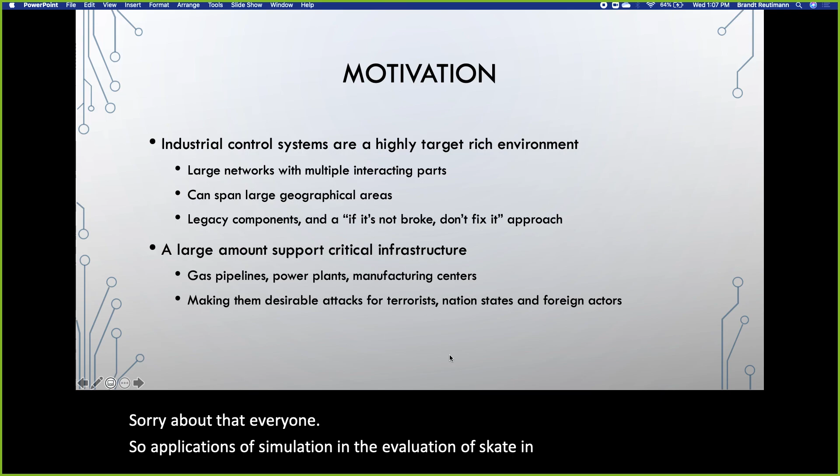Applications of simulation in the evaluation of SCADA and ICS security. So the motivation for our work. Industrial control systems are highly target rich. So what that means is they can typically be large networks with multiple interacting parts.

They can span large geographical areas, and they can have a very heterogeneous composition in the sense that there can be some legacy components, and there can be some new components, and there can be everywhere in between. So what you kind of get is this situation where you have some programmable logic controllers or PLCs that exist that might be vulnerable to cyber attack, and then some newer ones that maybe have the capabilities to prevent these

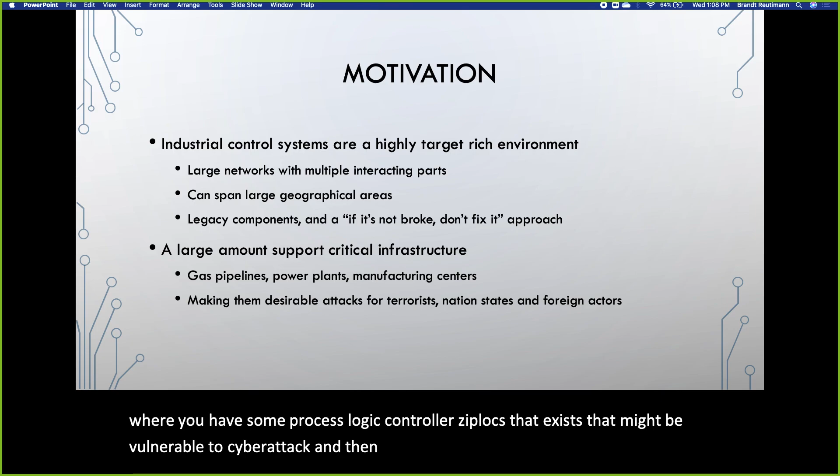attacks. But it's not an all or nothing type of scenario where you can just go in and replace everything with these new and highly updated pieces of technology just because these systems are large and it's expensive, right? So sometimes you don't want to mess with things that already exist, that already work. You don't want to break anything. Some people are opposed to bringing in these new technologies because they know what they have already operates pretty well,

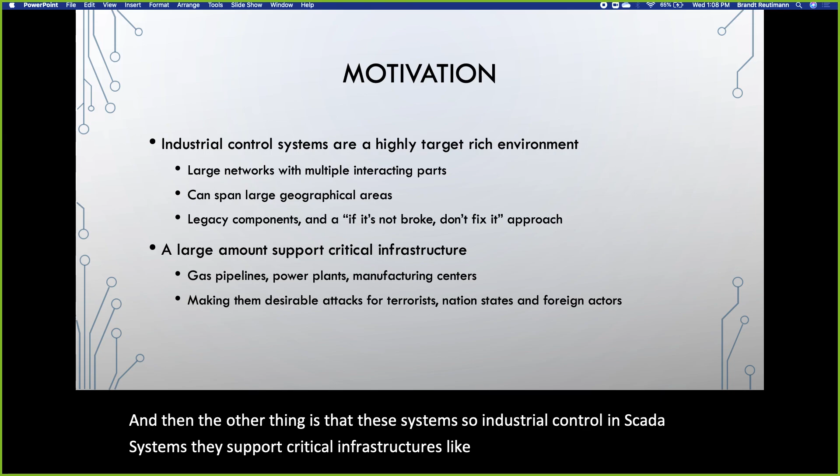right? And then the other thing is that these systems, so industrial control and SCADA systems, they support critical infrastructures like gas pipelines, electrical grids, some manufacturing centers, and other kind of, like I've heard of military bases and other things kind of using these systems, right?

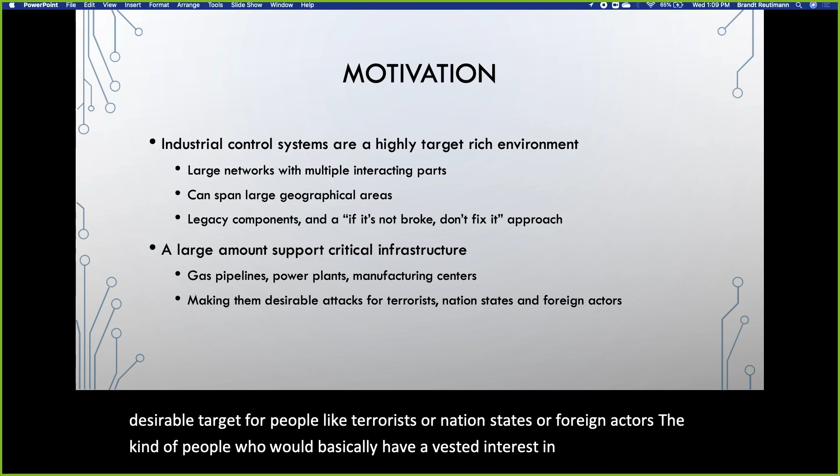And that makes them a desirable target for people like terrorists or nation states or foreign actors, the kind of people who would basically have a vested interest in either compromising these systems, causing harm, shutting them down, whatever. And so, as a result, we want to be able to defend these systems.

Well, testing industrial control systems, especially gas pipelines and electrical grids, testing them for safety is a common thing, and that has been something that's been done for a long time. It's been researched, because the ultimate goal is the people who work at these, whether they're power plants or gas compressors or whatever, those workers need to be able to do their job safely without getting hurt.

And these systems, almost equally as importantly, need to maintain availability. And what that means is that you can't have the power going on and off intermittently or gas going on and off intermittently. These systems need to maintain their availability, right? But the issue is that safety processes like the ones that have been developed haven't really been fully refined to deal with the kind of plethora of cyber attacks that are coming in this kind of new world, right?

As these systems start to become more connected to the internet, whether it's through corporate networks that are connected to these SCADA systems, or whether it's through maintenance workers whose laptops they bring to work and they're on the internet the night before and then they go into work or whatever. There's ways that these systems can be compromised, right? So we need to find ways to test cybersecurity on these systems.

And the issue is that testing on live versions of these systems can be extremely dangerous, it can be expensive, and it can be difficult, right? Because of just the nature of the systems and the fact that they have to maintain availability.

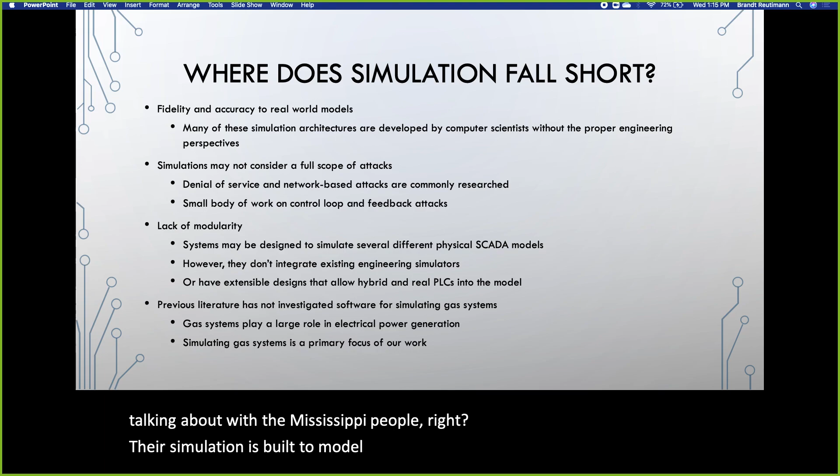I think part of that comes from the fact that a lot of people who work on these models are computer scientists who are really interested in the network security side, but don't necessarily have the knowledge to explore the control loop side. That's where it's useful to be able to collaborate with engineers. Then a lot of these systems lack modularity. They might be designed to simulate a specific physical model. That paper with the Mississippi people, right? Their simulation is built to model this water tower, and that's what it does. But it's not really extensible past that.

And they don't really integrate existing technologies very well. Some people will use Simulink, but it's fairly uncommon. And they're not really designed to swap in and out of these simulators, which we'll talk about later on in this presentation, integrating existing technologies to make these simulations better. The other thing is that a lot of these don't have an extensible design that can allow hybrid PLCs, real PLCs, and virtual PLCs. They might have one or the other, but they're not really able to do all of them.

And there's actually a lot of value to being able to virtualize some of your PLC behavior and have some of them be real and some of them be somewhere in between. That has to do with the cost associated with acquiring equipment, and also the ease of use you can get out of making your own virtual replicas of that equipment you've acquired, right? And then previous literature also has not really investigated gas systems.

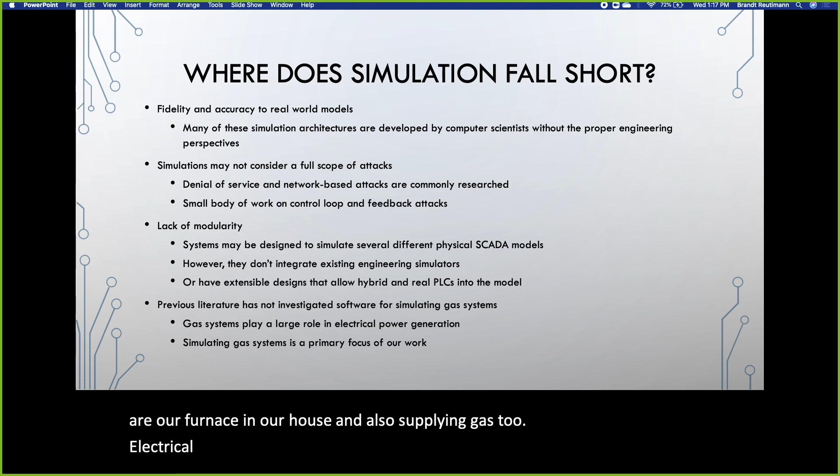A lot of work has been done studying electrical systems and trying to simulate them or build test beds for them. But gas systems actually play a very large role in our daily lives, right? Whether it's our water heater or our furnace in our house, and also supplying gas to electrical power plants. This is something that hasn't really been researched much in the prior literature. So that's why a large focus of our work has been simulating gas systems.

Okay, so why build another simulator? So where do we fit into this kind of whole scope of things? Well, we're trying to design and architect a simulator from the ground up, and we're trying to make it as modular as possible. And what that means is that we want to be able to integrate different physical simulators.

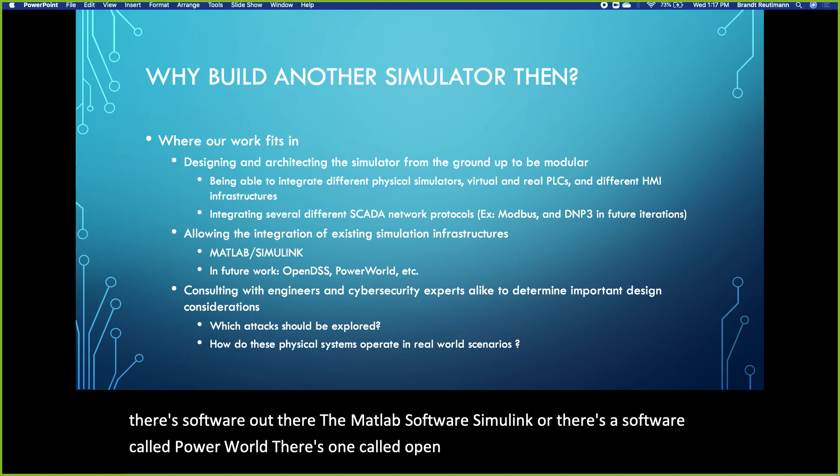So when I say a physical simulator, there's software out there, like the MATLAB software Simulink, or there's a software called PowerWorld. There's one called OpenDSS, I think, where these are kind of built by engineers or really smart people to model these types of systems very accurately using these mathematical models. And we want to be able to leverage that existing technology. So instead of having to go and write our own simulations, leverage the simulations that already exist and integrate those into kind of a cybersecurity environment.

So we want to be able to integrate different physical simulators. We want to be able to take real PLCs that we can acquire if we get funding, or build our own kind of PLCs out of software, and then also integrate different HMIs so that we kind of have this simulation where we can change parts in and out in order to kind of get what we want. So maybe Simulink is good for a gas system, but maybe there's a better simulator for electrical system, let's say. So maybe if you can swap those out, you can kind of do different simulations that way.

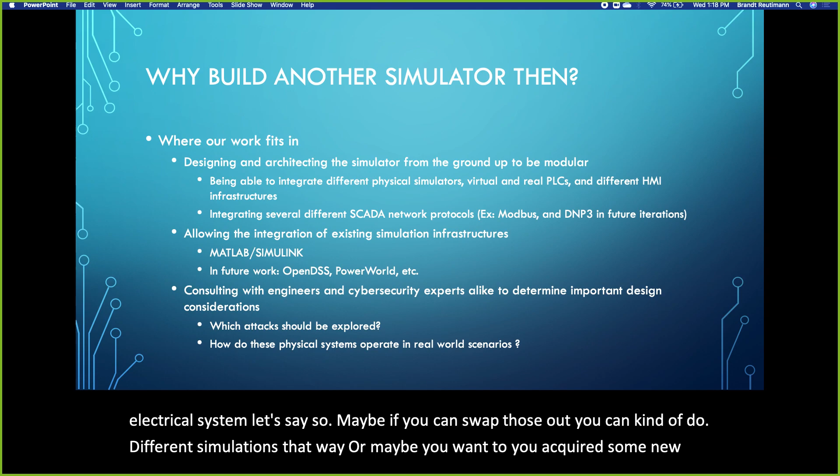Or maybe you acquired some new PLCs and now you had an experiment you were running. Now you want to see what it looks like with this new technology in there. Or maybe you were running an experiment and you want to look at, okay, this company like General Electric has an HMI that they support, and maybe you want to test that HMI with your kind of simulation, or maybe you want to train people on that HMI and use the simulation as a backend. So that's why we want to design it to be modular so we can kind of meet all these different demands, right?

And then again, in the same kind of scope, we want to be able to integrate different SCADA network protocols. So the primary one we use in our simulation is called Modbus, which is an older protocol that's been around in industrial control systems for quite a long time. But there's a kind of new kid on the block protocol called DNP3 that's very popular and is gaining traction. And so what we want to do is be able to kind of swap these network protocols in and out to see, okay, what happens if you were to add encryption to Modbus, or what happens if you use DNP3 and someone tries this kind of attack on the DNP3 protocol. So kind of things like that, right?

And then finally, and I think most importantly, and why I'm grateful that, for example, Dan is here, is consulting with engineers, people like Dan and people at the Powerhouse, people like Sule, and then cybersecurity experts like Dr. Ray and Dr. Gersh, people who have the knowledge of the cybersecurity. Bringing those two groups of people together is super, super important when you're designing these systems, right?

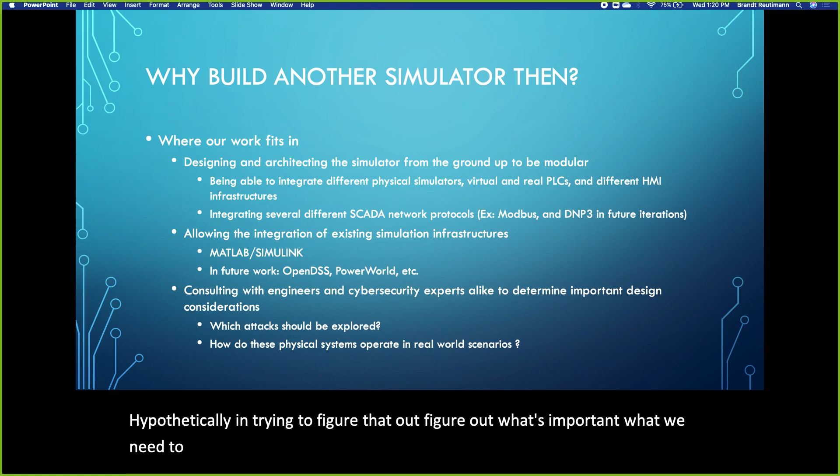So figuring out which cybersecurity attacks and cybersecurity concerns should we be looking at, but then also figuring out, okay, from the engineering experts, what happens to these physical systems if we were to do this attack hypothetically, and trying to figure out what's important, what we need to be modeling, and then integrating that into our technology that we're using to study these systems.

Okay, so we went a lot over what we aim to do and the motivation for how we got here. So before we dive into the design of our system, I want to talk about these important considerations, and we've gone over it a little bit in the goals of our system, but just to make it a little bit more clear. So this is something I talked about, so I'm just going to skim over this slide, but integrating with existing technology, right?

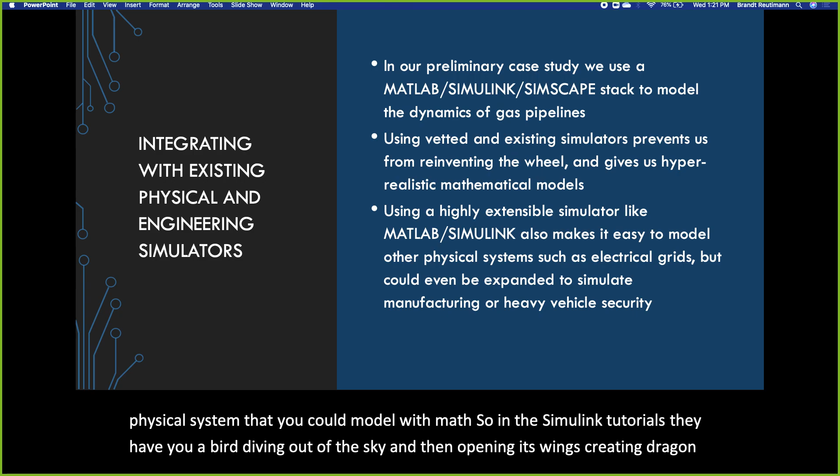So in our model, we use the MATLAB Simulink stack, which is basically a block-based language that can be used to model almost any physical system that you could model with math. So in the Simulink tutorial, they have you modeling a bird diving out of the sky and then opening its wings, creating drag. And so that's a system of equations, right? In the same way, gas systems can be modeled with these kinds of complex mathematics.

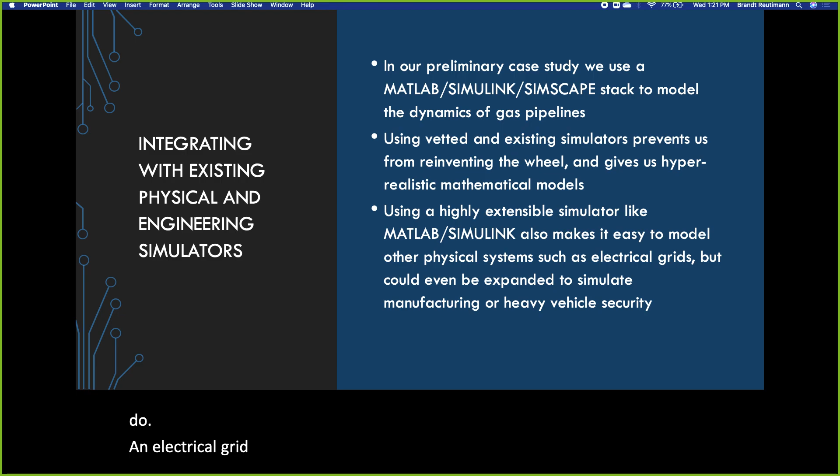But also the value we saw in using this type of Simulink software was that it's not limited to just gas systems, but in future iterations of the project, if we wanted to do an electrical grid, or even simulate a manufacturing center, or even possibly integrate this somehow with the heavy vehicle security work, it might be possible to use Simulink as a simulator for that backend.

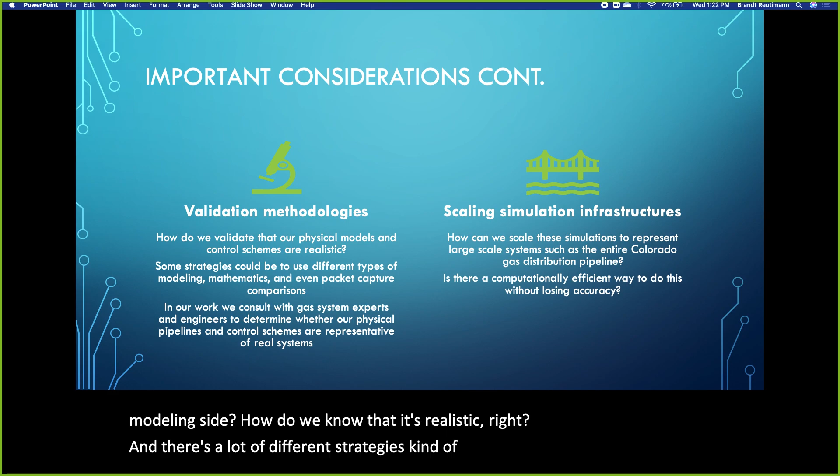So some other important considerations are validation methodologies, and this is something that Dan and I were talking about before the presentation: how do we figure out, especially from the physical modeling side, that what we're doing is realistic? And there's a lot of different strategies to approach this problem. So you could use different types of modeling mathematics and go, okay, the math makes sense, it works out.

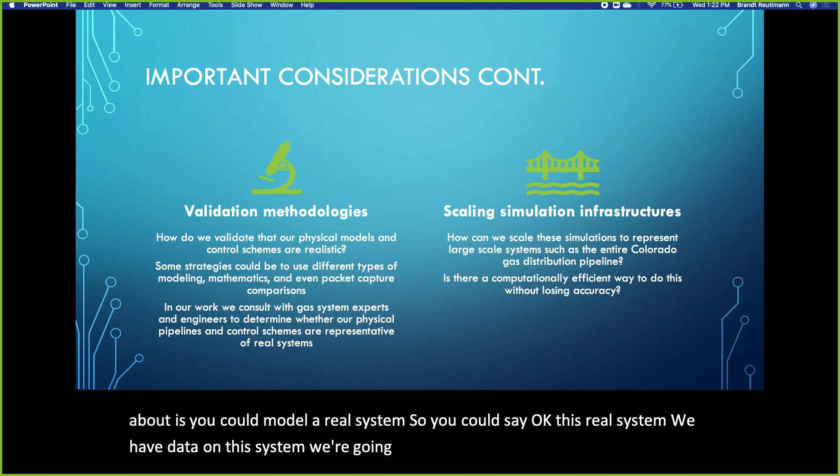One way you could do it, and what I was talking about, is you could model a real system. So you could say, okay, here's this real system. We have data on this system. We're going to try and make a replica in simulation. And then you compare the data that comes out of your simulation with the data in the real world, and you could even compare the packet captures from your simulated controllers to packet captures from real controllers, and using some clever diagnostics and measurements of distance between those two data sets, you could determine how close you are to the actual thing.

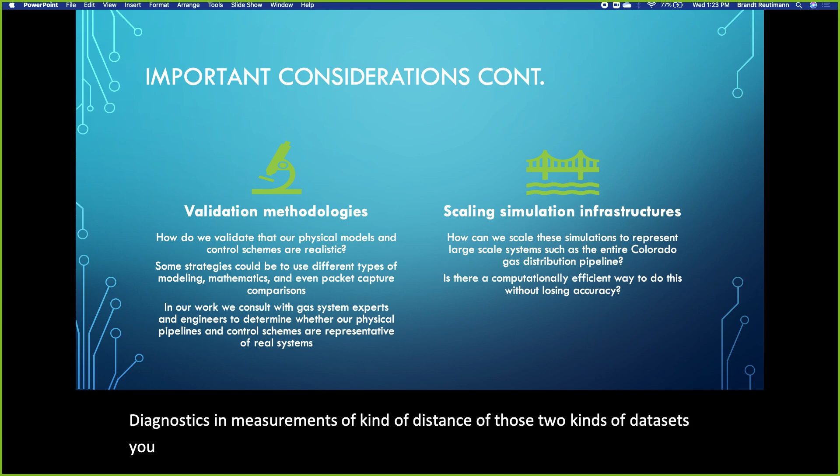The downside to this approach would be that you couldn't take the real system and put it into a sketchy state, right? So with your simulation, you can cyber attack it, and you can say what would happen if all these gas systems suddenly lost a bunch of pressure. You couldn't compare that situation to the real system, because you're never going to want to put the real system in that kind of state that could cause harm to it, right?

So where we are right now in our work is that we mostly just consult with the experts around us, or at least I do, to try and figure out how far off we are, and if we're in the ballpark of how a real system would actually act.

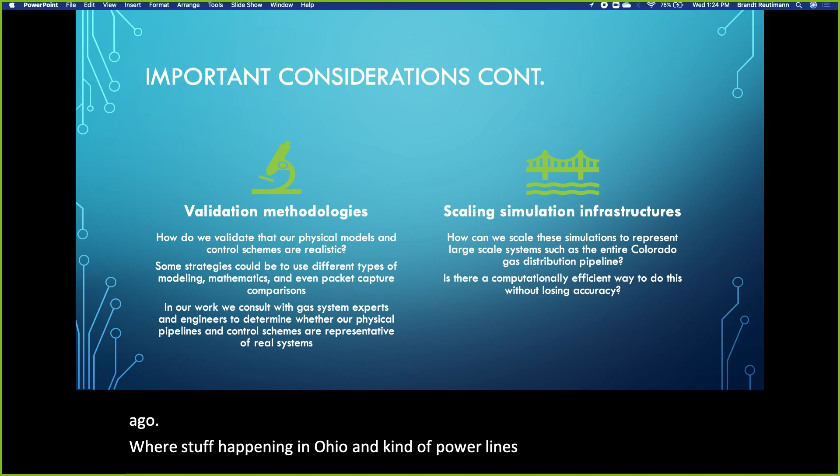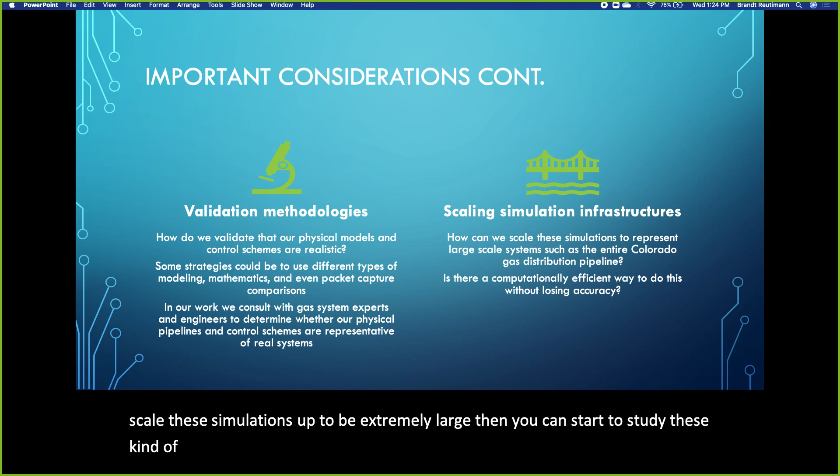Then scaling simulation infrastructures is the next consideration. Simulation really gets useful the larger you can make it in some respects. So there's an East Coast blackout that happened a few years ago, where stuff happening in Ohio and power lines going down caused power outages in New York and in Canada and all over the place. And like I said, previous work has been pretty small scale, and if you can find ways to scale these simulations up to be extremely large, then you can start to study these interdependencies that happen between these systems, right? And so this is a super important consideration, and something that we haven't fully covered.

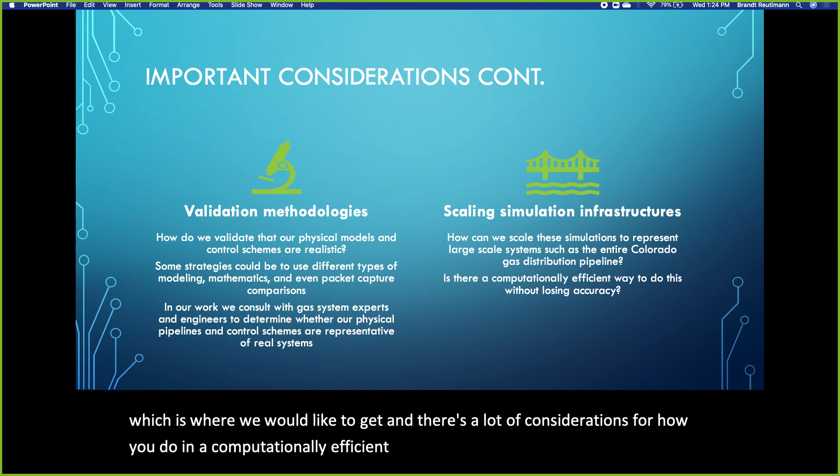So our models have probably 20 to 25 controllers in them, and we do have a model that's a rough scale, medium sized, but we don't have something on the order of thousands, which is where we would like to get. And there's a lot of considerations for how you do that in a computationally efficient manner. So you either need a really powerful computer, or you need to do some clever tricks to model. Let's say you can model 200 controllers in a very simplistic way instead of having to model them in depth, and then that would allow you to focus in depth on other areas, right?

So there's tricks that you could do to scale these things up, and that's a future direction of our work, but it's still a really important consideration for making these simulations valuable in the long term. Okay.

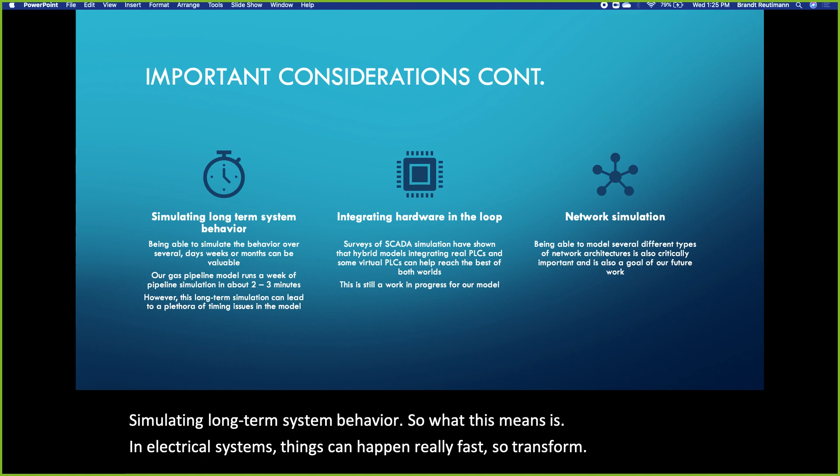Simulating long-term system behavior. So what this means is, like in electrical systems, things can happen really fast. So a transformer could go offline, or a power line could go down, and that could cause a failure within minutes. But with our gas pipelines, because they're physically moving gas in the simulation, and that takes time, it's a lot slower. And as a result, if we were to run these simulations in real time, we would be trying to study the behavior of something occurring over 2 or 3 days. In real time, it's just not very useful.

So what we want to do is be able to kind of speed that up and simulate those 2 or 3 days in a few minutes, and then be able to explore the results in depth. However, when you speed this simulation up, it can lead to other issues, and that's something that we can talk about later on in this presentation.

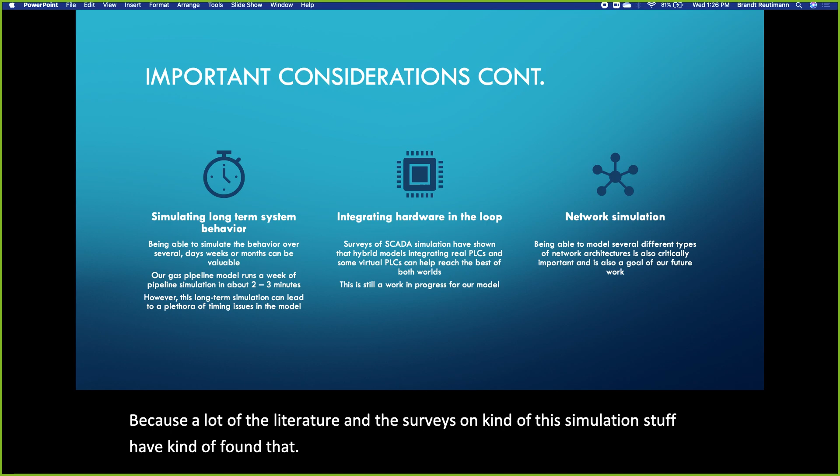Then integrating hardware in the loop. So I talked about this a little bit earlier on, but you want to be able to actually get some real hardware in there. So right now we're almost entirely virtual, but we're working hopefully at some point in the future to get some real hardware hooked up into our simulation system, because a lot of the literature and the surveys on this simulation stuff have found that when you integrate your virtual PLCs with your real PLCs with your simulation, that's when you get the best of both worlds.

So you get the accuracy of these real PLCs, but you also get the cost efficiency and the ability to scale that you get from creating virtual models of real things, right? So this is still a work in progress for us, but it's something that we'll hopefully have out in the future. And then finally, the last consideration in this list is network simulation.

So our simulation is a fairly rudimentary SCADA network, but what we will be working towards eventually is being able to model several different network architectures. So why this is important is because of network-based attacks; denial of service is just one network-based attack, and there's all sorts of protocols that exist in computer networking that have their own unique vulnerabilities.

And in addition to this, because these systems can scale over large geographical areas, it's possible that you have certain delays that are introduced in a real system that we're not really able to model because we're not able to delay the network traffic, right? We just have things occurring as they occur.

But we would want to be able to model that behavior of like, okay, when you send a packet from, let's say, Denver to some controller in the Fort Collins area for whatever reason, there's going to be some sort of round-trip delay that occurs between the decisions you're making in Denver and the behavior that's occurring in Fort Collins. And that's something that is useful to model.

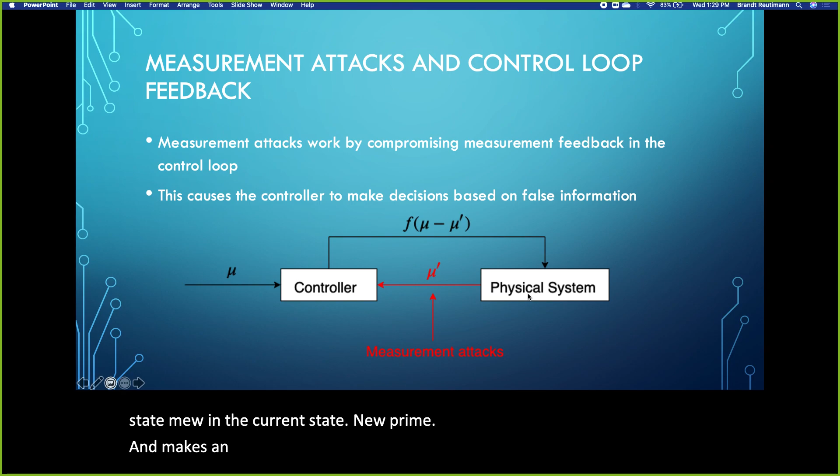Mu prime is the reading that you're getting out of the physical system, and then you have some function that takes into account the difference of the ideal state mu and the current state mu prime and makes an adjustment based on that. So I think the best example I can give is a thermostat.

Your thermostat has a thermometer on it, and the thermometer determines the temperature in your house, and then the thermostat adjusts the heat or the AC based on that, right? So in this scenario, you have a desired temperature. You want to keep your house at 70 degrees, and then your thermometer might read 65, so it turns on the heat, and that 65 would be your mu prime.

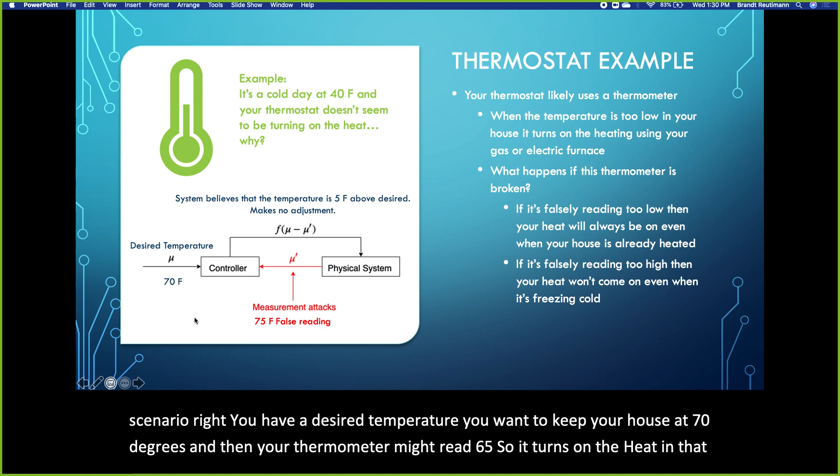So what a measurement attack is like: let's say that it's a cold day, it's 40 degrees out in your house, and your thermostat isn't turning on. It's not heating your house. So what's happening? Well, let's say that the thermometer on your thermostat is broken or it's being tampered with. It's reading that the temperature in your house is 75 degrees, even though the temperature is 40 degrees.

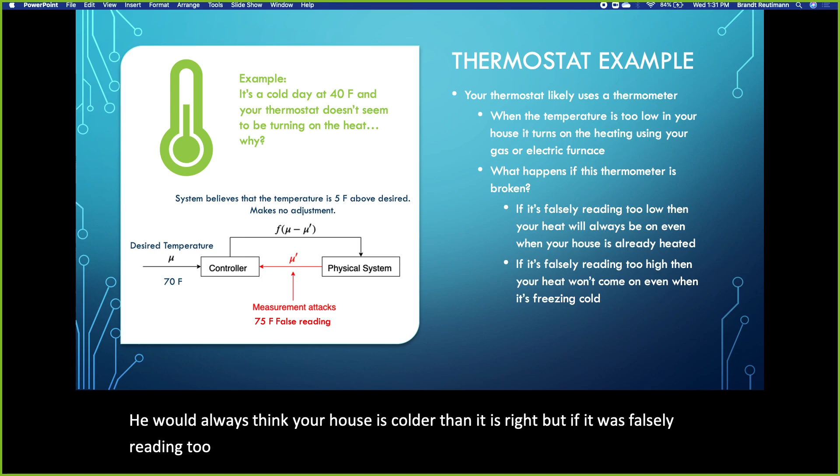And so as a result, your desired temperature is 70, and it reads this difference, and because the only way your thermostat knows about the world is through this thermometer, it thinks that everything's fine even though everything's not. So if it was falsely reading too low, then your heat would always be on because it would always think your house is colder than it is. But if it was falsely reading too high, then your heat might never come on because your thermostat might always think that your house is warm even though it's freezing cold.

This seems kind of like a funny and contrived example, but I was reading an article online on Lifehacker of people doing this in their office. In the winter, when they'd keep the temperature low, people would put an ice pack on top of the thermostat, and this would actually cause it to heat up their office. So I thought that was kind of a funny example.

But the main point to take out of here and why we want to study this is if you can manipulate a sensor or some set of sensors, it could be possible for you to change the behavior of the controllers in the system. And that's the main point that I'm trying to make.

So before we go into all these experiments, I'm going to talk about the design of the simulation that we have built and have been using to run the experiments, and then we'll talk about measurement attacks on the simulation. We'll talk about the models we built in our simulation and then the measurement attacks we've done on them.

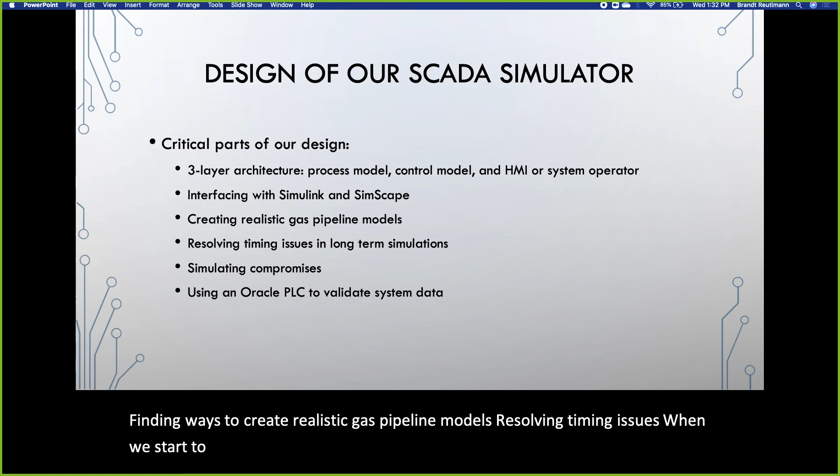The critical parts of our design are this 3-layer architecture that we've come up with, which Jerry, Duggan, and I have worked on together for the past couple years. Then being able to interface with Simulink and Simscape, which is a library extension of Simulink. Finding ways to create realistic gas pipeline models. Resolving timing issues when we simulate a week over 3 minutes. Simulating compromises in the system, and then using something we call an Oracle PLC to get out the authentic data even when we are doing measurement attacks.

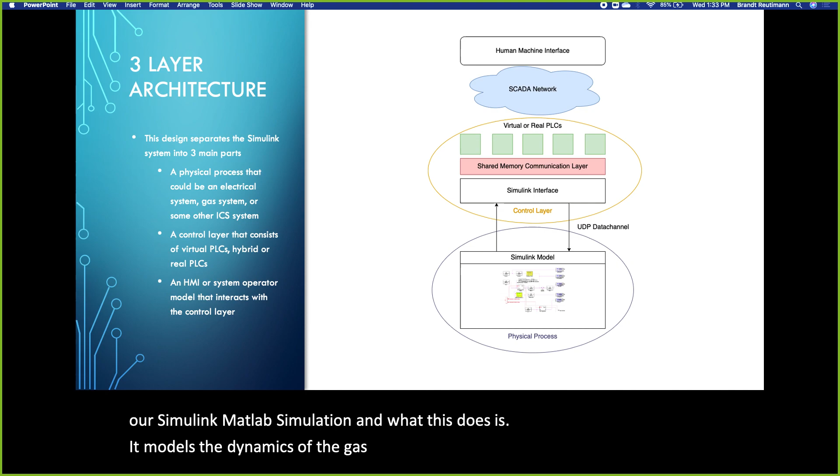So to start with, the way that we have this simulation laid out is in this 3-layer stack. At the bottom layer, we have our physical process model, our Simulink MATLAB simulation. What this does is it models the dynamics of the gas system: the mass flow, the temperature, the pressure, and everything occurring in the system. It basically chugs away and solves a bunch of equations.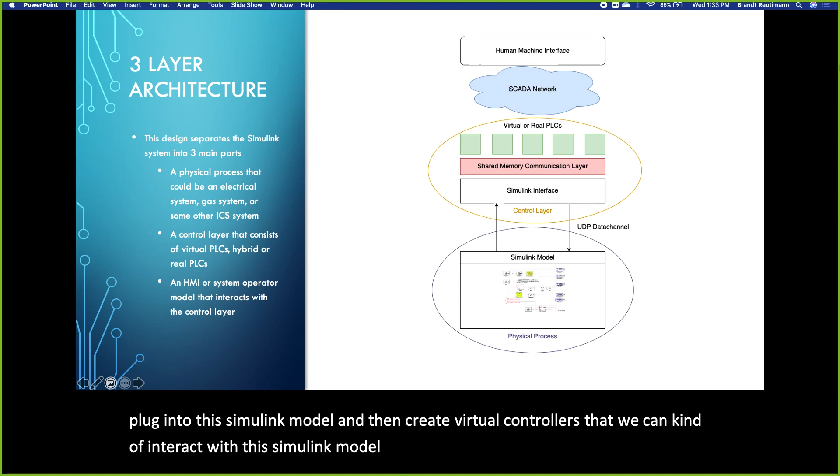On top of that, in the second layer, we have what would be the control layer in an ICS system. We have built our Simulink interface, a piece of software that allows us to plug in to this Simulink model and create virtual controllers that interact with the model. We do that using UDP data channels to send data in and out of the model using network blocks provided by Simulink. The Simulink interface distributes that data amongst these different PLCs.

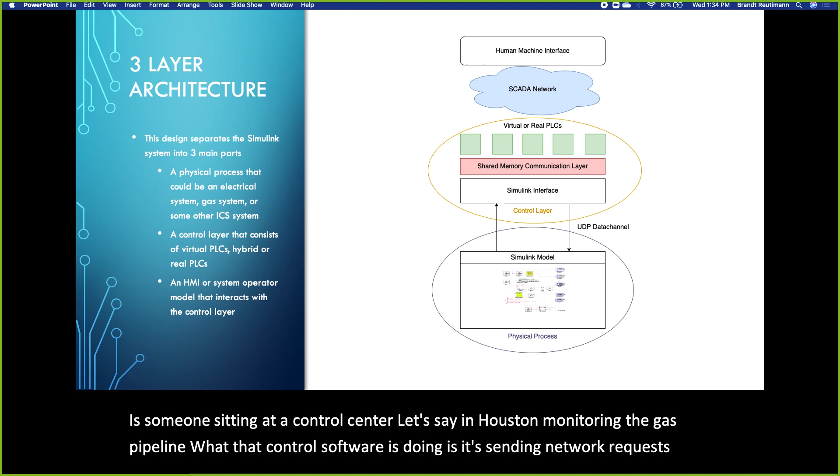The PLCs can either make decisions themselves about things occurring in the simulation, or they act as Modbus servers. Typically a PLC will have a Modbus server, and this will interact with the third layer, the human-machine interface. If someone's sitting at a control center, let's say in Houston, monitoring the gas pipeline, that control software is sending network requests to these different PLCs and reading the data that they have. The PLC reads something from a sensor and stores it in a register, and then software requests the data from that register using the Modbus protocol.

So what we have here is our physical process, our control layer, and then our human layer. And between the human operator layer and the control layer is where our SCADA network is.

Okay, so how does this interface work? So I talked about how it uses UDP network blocks to get data in and out of the Simulink process simulation. So what this Simulink interface is really doing is basically a publish-subscribe mechanism, but it's a single-threaded server that uses select.

So when you are creating a bunch of virtual PLCs, they each register themselves to the select server and say, hey, I'm listening for data that's coming out of the simulation on this channel. And then the Simulink interface basically fires up a bunch of servers to listen for that data coming out of the simulation. And then it dispatches data to each one of these workers.

So what's happening is this Simulink interface gets data, it puts it on a queue, that data gets popped off of the queue, and that worker reads the data, and it updates the state of the system within this virtual PLC. And then if you want to respond back through the interface, there's a specification for it in the configuration files. There's a pipe that's created between the Simulink interface and the actual virtual PLC.

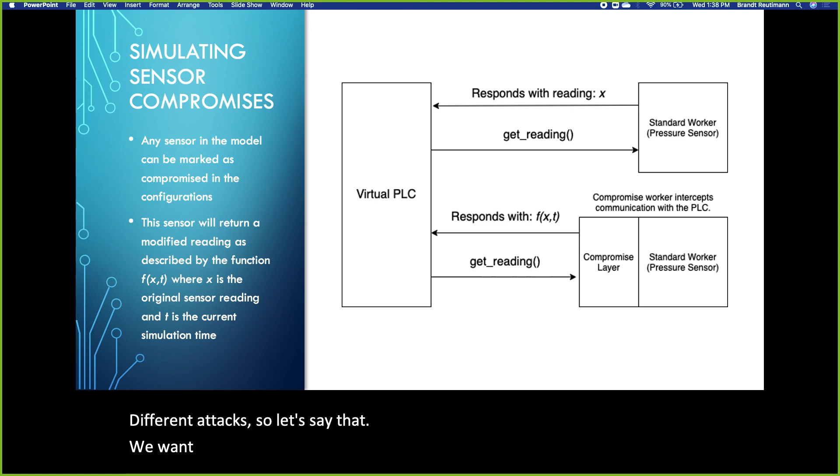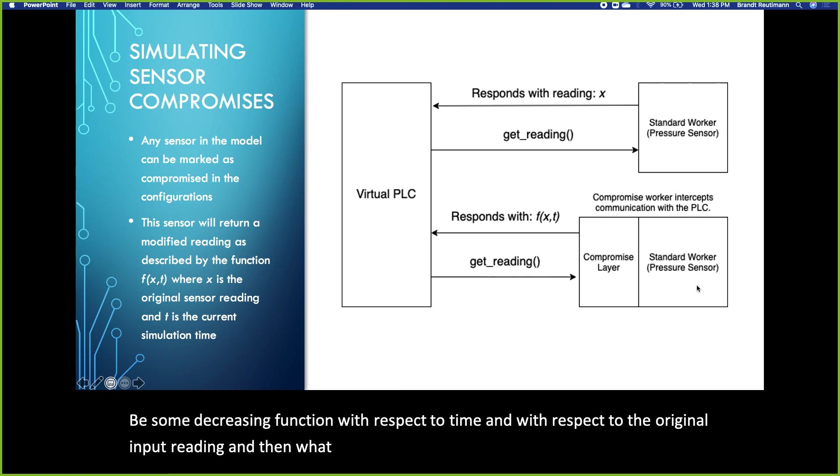So let's say that we want this sensor, let's say it's a pressure sensor in the system, to show a steady decline over time. So we design this compromise layer to be some decreasing function with respect to time and with respect to the original input reading. And then when we go to pull this reading, the original reading is modified by whatever this function is, and then it's returned to the virtual PLC.

So then these PLCs are talking to the Simulink interface, right? There's some compromised data that's being extracted out when the Modbus servers are queried. So when we're running these simulations and we have the compromises set up, doing these measurement attacks, how do we differentiate the real data from the fake data? What we do is we use something called an Oracle PLC.

And this Oracle PLC is really just another virtual PLC, but it's solely responsible for collecting data that is authentic. So because the compromises are specified within the virtual PLC, we can create another replica and assign it all those workers that we're compromising in our configuration.

And then that Oracle PLC will be our source of ground truth data. And this is really important because then it allows us, when the simulation is over, to compare the lie data to the real data and see the disparity between the two. And we'll see that when we look through the experiments.

Okay, so the Oracle PLC also has an important responsibility, and it has to do with propagating time. So, like I said, we want to be able to speed the simulation up, right? So we want to be able to run 3 or 4 days in the course of a few minutes. Well, if we want to do that, we need to have some way of informing the rest of our simulation stack of what's going on, right? Because simulation time is only really known to Simulink. Simulink has its sense of the simulated world, but we need to find a way to propagate that sense of time throughout the whole system.

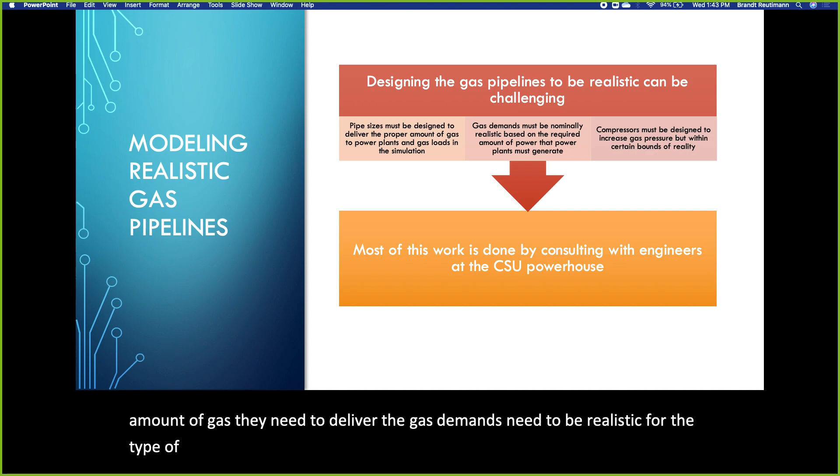Okay, and then modeling the gas pipelines. So my work has been equal parts building this Simulink interface and equal parts modeling these gas systems. And it can be very challenging to model these things in a realistic fashion, right? The pipes must be sized properly to deliver the amount of gas they need to deliver. The gas demands need to be realistic for the type of system that they're in. And the compressors need to be designed so that they're compressing gas in a fashion that makes sense and not using too much power. But most of that work has been done by consulting with people like Dan and working with Jerry and trying to figure out how we can make these simulations as good as they can be for what we're trying to do.

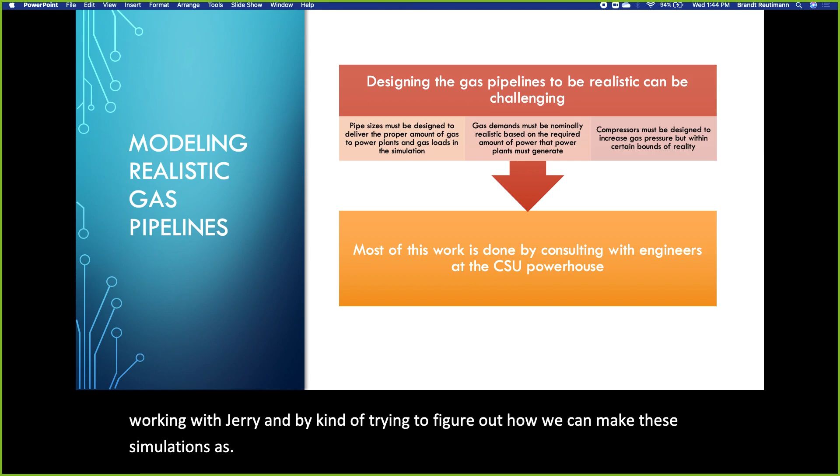So in addition to modeling the gas systems, there's also this process of modeling the operators of the system. So people who would be sitting behind a desk, watching a human-machine interface and making decisions about the state of the system and maybe making some control adjustments.

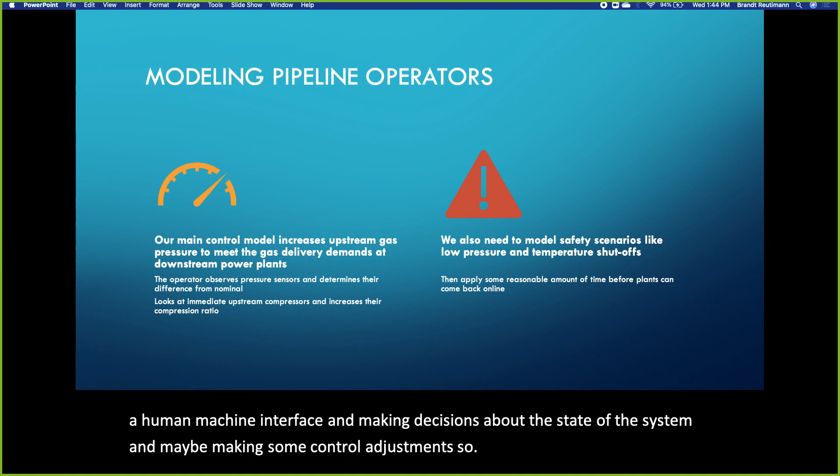So mainly with our control model, at least in experiment 1, we use this approach where we look at the downstream power plants and compressors and we update the pressure inputs into the system based on that disparity. In our more advanced simulation, these compressors have a power limit on them, right? So it requires energy to compress gas.

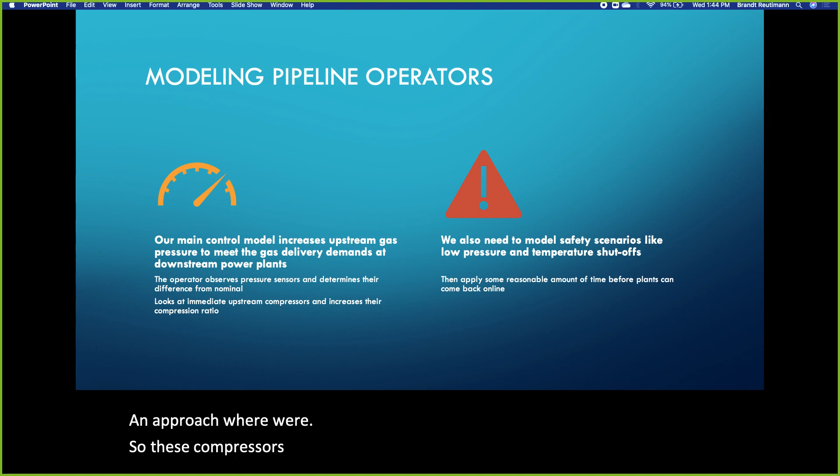And if that energy is exceeded, basically the compressor is only going to compress as much as it's able to for that given amount of power it's supplied. So what we do for our more advanced model is we adjust the amount of power we're supplying to the compressor to allow it to compress more gas. And then we also want to model scenarios like low pressure and temperature shutoffs. And this is actually something that's done in the simulation now.

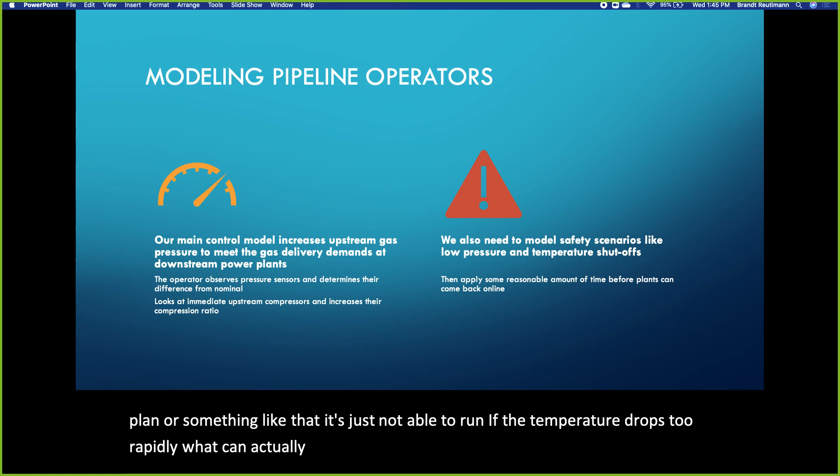But basically, with these systems, if the pressure gets too low, then there's not enough gas being supplied to a power plant or something like that. It's just not able to run. If the temperature drops too rapidly, what can actually happen is the gas can freeze. There's something called a dew point with this gas, and I'm not a complete expert on it, but basically it can become, as Dan's described it to me, kind of like shotgun pellets floating through these pipes, right? And so this can cause damage to the system.

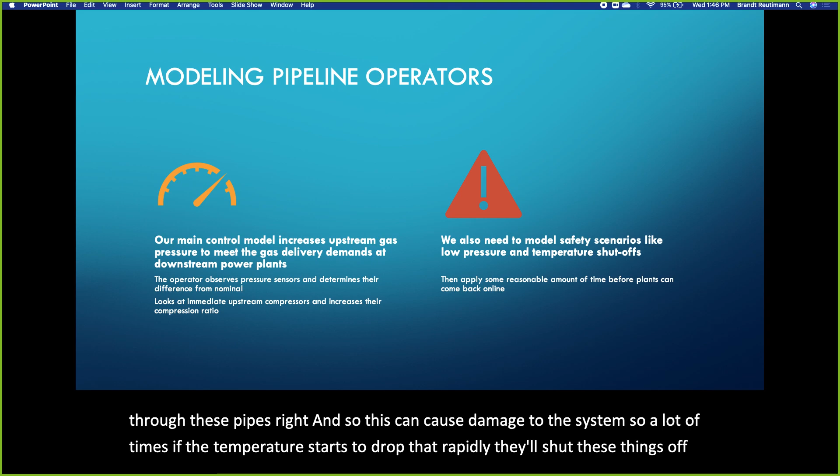So a lot of times, if the temperature starts to drop that rapidly, they'll shut these things off before it ever gets to that point. So modeling these operators is the third part of the modeling that we're doing, right? So we're going to move on to our example models and look at our experiments now. The first thing is our small scale model, and this is just to get us oriented, demonstrate a basic measurement attack, and then we'll move on to our more sophisticated model.

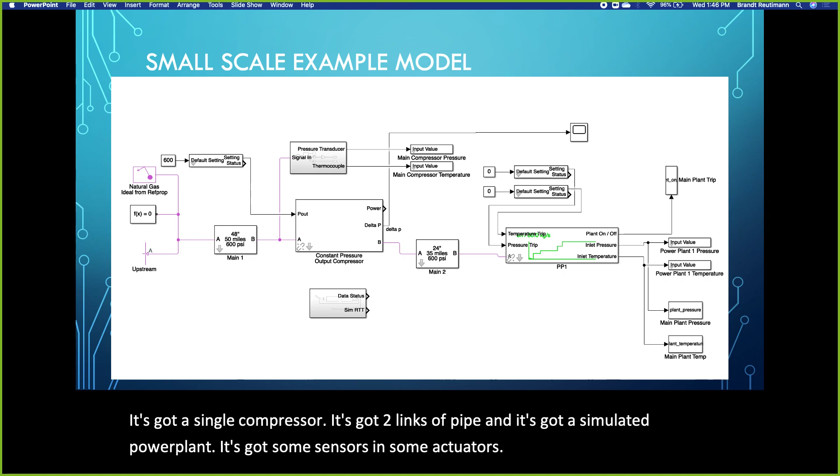So what we have here is a basic model. It's got a single compressor, it's got 2 lengths of pipe, and it's got a simulated power plant. It's got some sensors and some actuators. And so the control for this model is we have a piece of software that's reading this pressure value that's coming out of the system, and it's adjusting this input setting for the compressor.

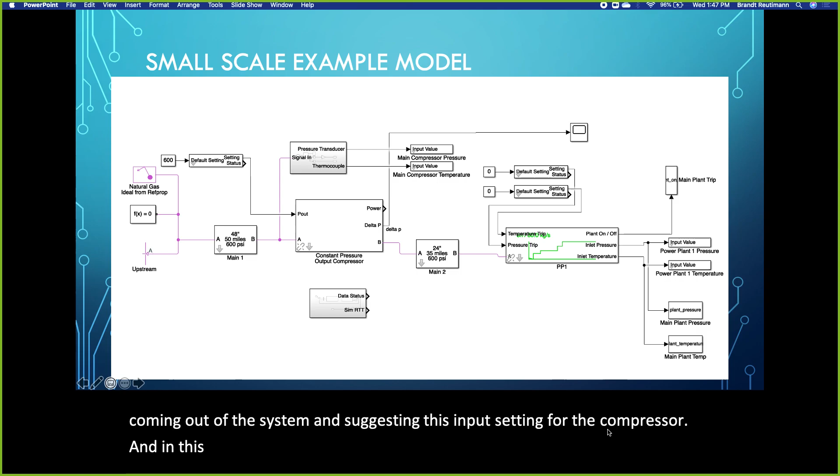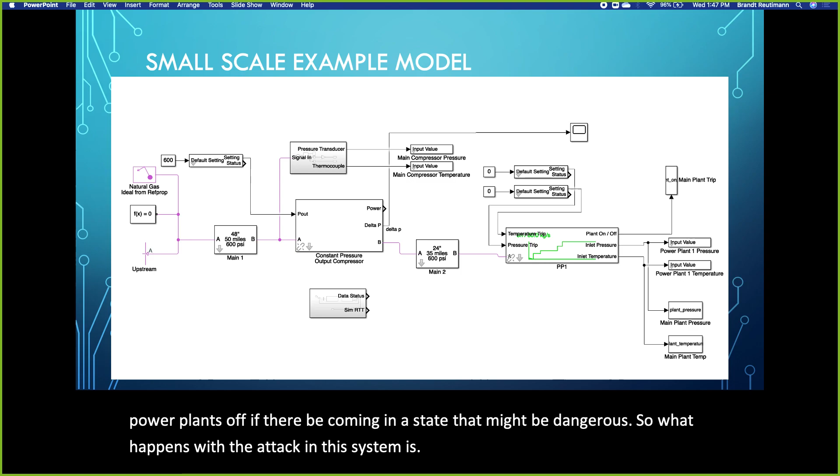And in this system, for the sake of example, the process of this power plant tripping off is not actually in the physical model, but it's on the control side. So the controller can be told to trip the thing off. So it allows the operator of the system to turn power plants off if they're getting into a state that might be dangerous. So what happens with a measurement attack in this system is we take this pressure reading here and we lie about it. We have it gradually decrease over time. And so eventually it gets to the point where the power plant is going to trip off, but it also causes the operator to make adjustments based on false information.

So why is this happening? Well, the operator of the system thinks that the pressure is low here. As a result, that person is adjusting the pressure up here and increasing the output of the compressor in hopes to compensate for this loss. But in reality, there was no loss in the first place. This is just a faulty sensor, right? So what this causes is for the pressure in the system to increase.

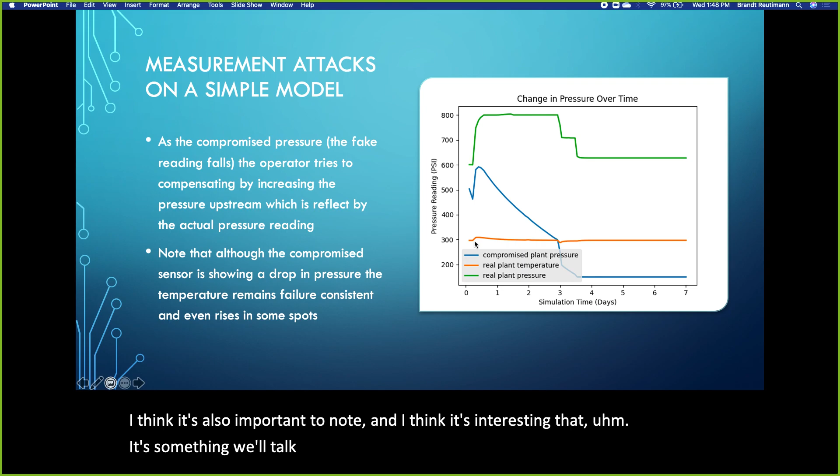And then down here the power plant, I think, trips off somewhere around this point. But I think it's also important to note, and interesting, something we'll talk about in the future work section, that even though we're lying about the pressure, this is the temperature reading that is being received by the operator. The temperature isn't changing too dramatically. So normally if you'd see this change in pressure, you would also see some change in temperature associated with it because of gas laws.

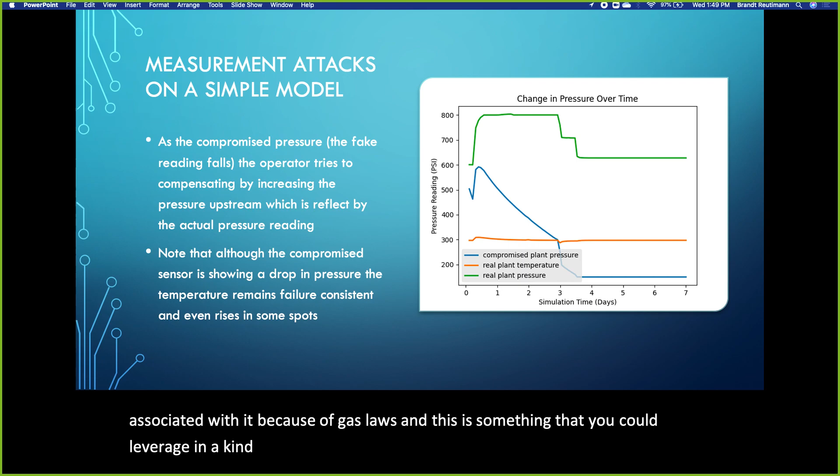And this is something that you could leverage in a kind of scenario where you're trying to defend against these attacks. And that's something we'll talk about later on. But basically the idea here is to get us oriented with what the basic nature of this kind of attack would look like.

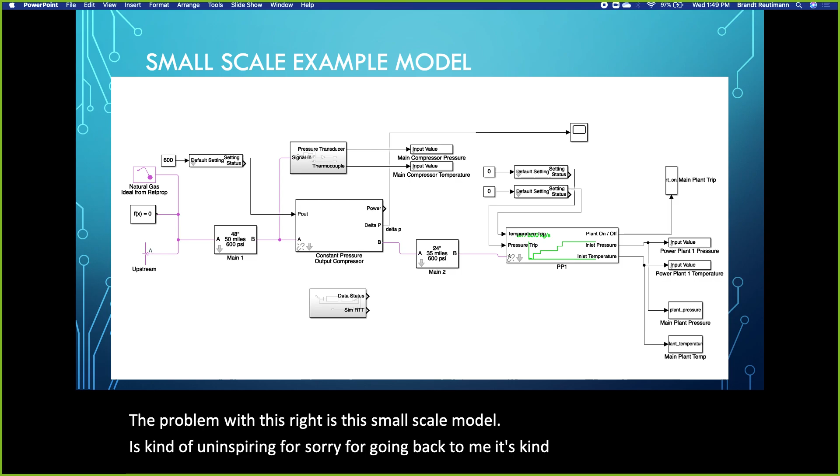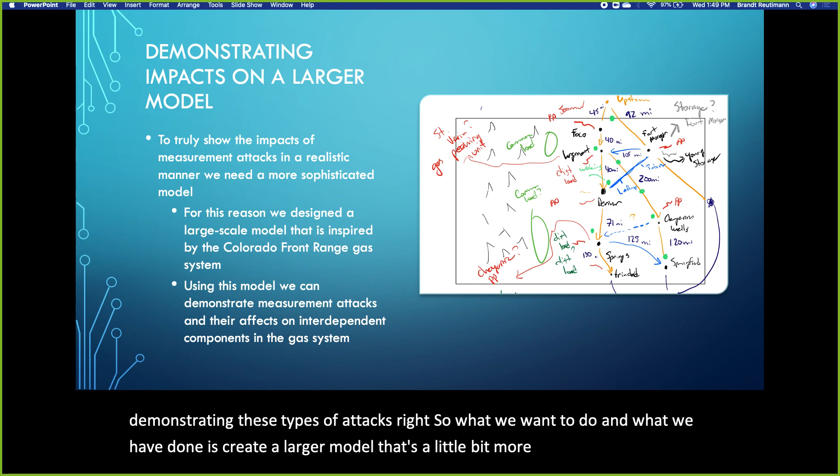The problem with this, right, is this small scale model is kind of uninspiring for, oops, sorry for going back too many. It's kind of uninspiring for demonstrating these types of attacks, right? So what we want to do, and what we have done, is create a larger model that's a little bit more sophisticated to truly try and show the impacts of these attacks in a more realistic manner, right?

So for this reason, we designed, I call it the Colorado gas model, but really what it is is a model that's inspired by the Colorado Front Range gas system. Using this model, we're able to demonstrate measurement attacks in a more interdependent system than just this single power plant, single compressor scenario.

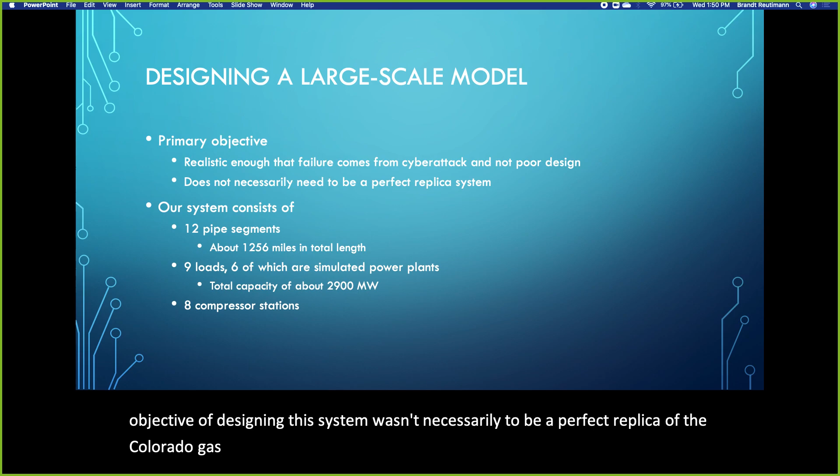So how did we design this model, and what did we go through? Well, the primary objective of designing this system wasn't necessarily to be a perfect replica of the Colorado gas system, although that could be a possible future scenario now that we have some of the data that we didn't have before. But the main goal is that we want this model to be realistic enough that it fails because of these cyber attacks we're testing on it and not because it's designed poorly.

So for reference, the model that we have is about 12 pipe segments, and if you were to sum those up, it's about 1,256 miles of gas pipe. There's 9 loads in the system. 3 of them are distribution loads, like for your water heater and that kind of stuff, and then 6 of them are simulated power plants. The total capacity of these 6 simulated power plants is about 2,900 megawatts, and then there are 8 compressor stations through these gas lines.

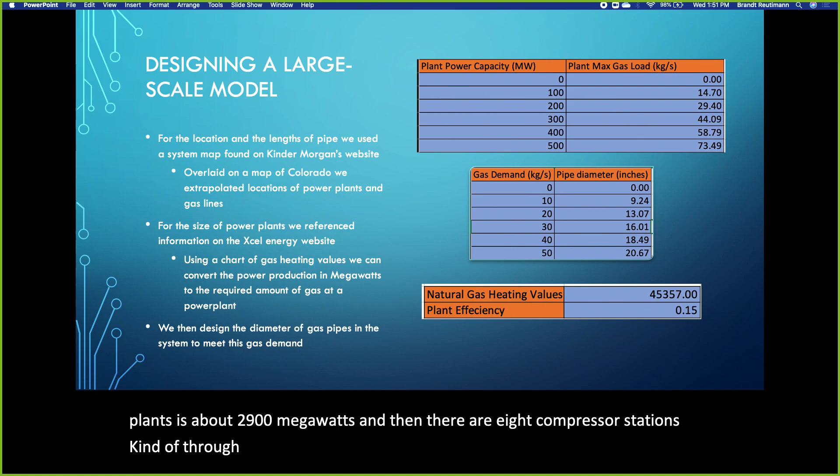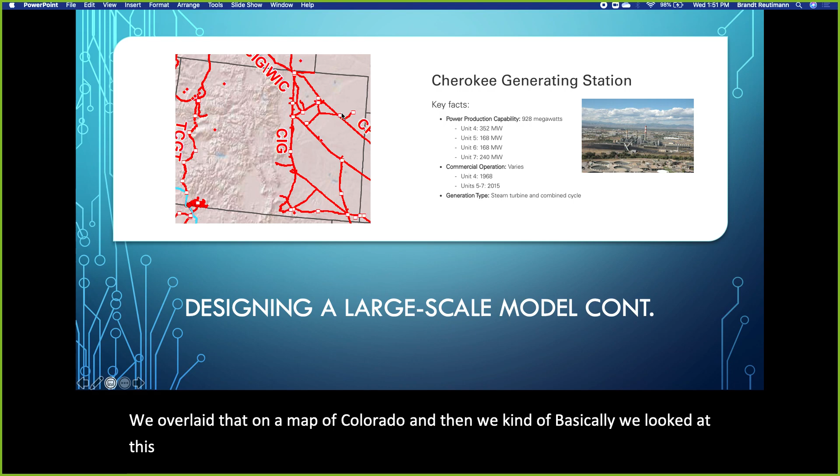So how do we design this model to be realistic? Well, for figuring out the locations of where compressor stations might be, and for looking at the length and distance of the pipe, we took this system map from Kinder Morgan, which is up here on the left, and we overlaid that on a map of Colorado, and we looked at this and said, okay, that looks like Fort Collins, and that looks like Longmont, and there's Denver, right?

And then these red things are gas lines, and these little stubs likely indicate either a power plant or gas storage or some sort of leaf node of this tree, so to speak, right? So we overlaid that on a map of Colorado, figured out where we think power plants might be, where major cities are, where compressors might be, and then we used some Google mapping to figure out the distances and stuff.

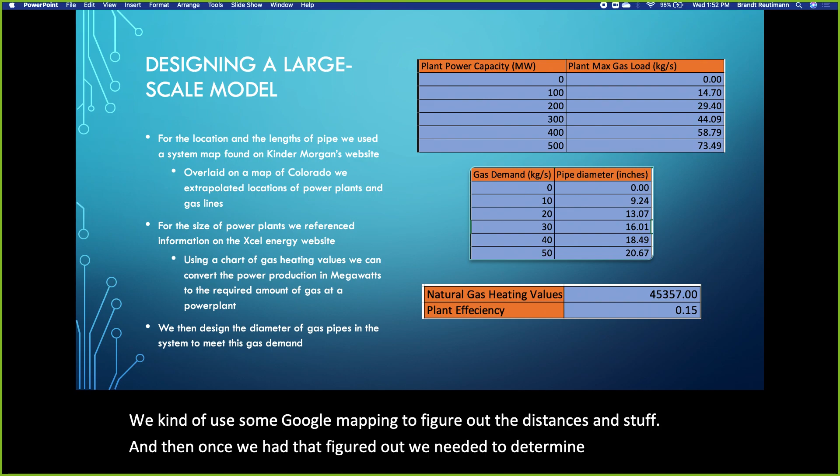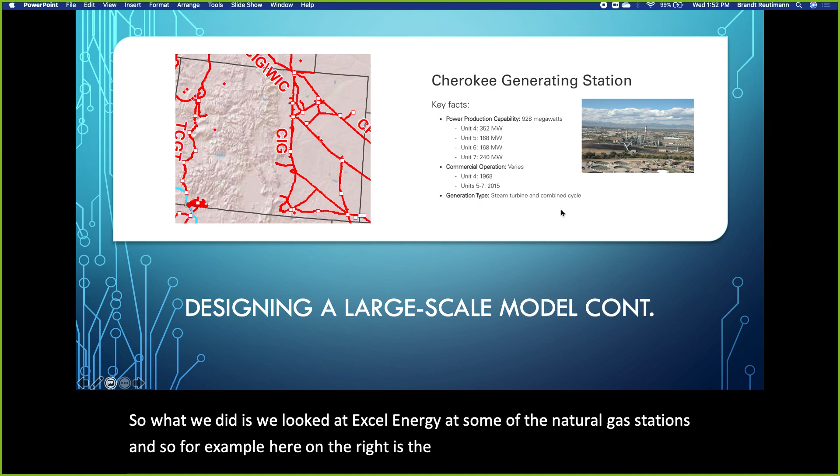And then once we had that figured out, we needed to determine how big these power plants needed to be so that we could design realistic gas loads. So we looked at Xcel Energy at some of the natural gas stations. For example, here on the right is the Cherokee station in Denver. And this station has a capacity of about 930 megawatts.

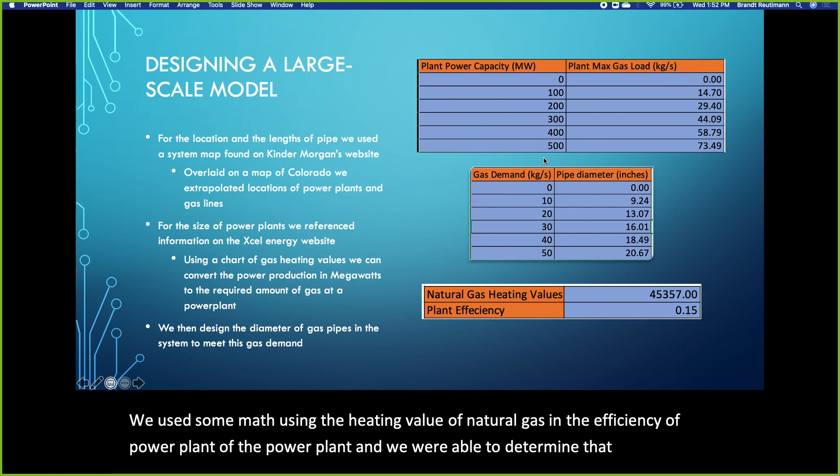So we said, okay, 930 megawatts, how much gas is required to generate that much power? Well, we used some math using the heating value of natural gas and the efficiency of the power plant, and we were able to determine that, for example, a 400 megawatt power plant will require 58.79 kilograms per second of natural gas being supplied in order to generate that much power.

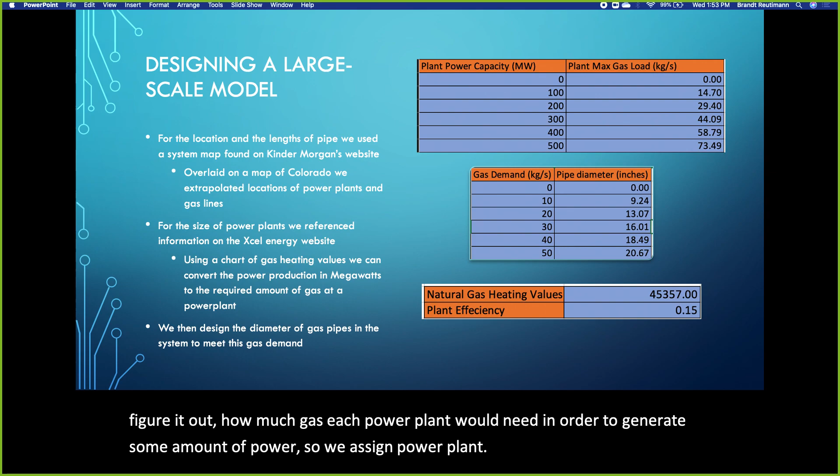So once we had figured out how much gas each power plant would need in order to generate some amount of power, we assigned power plant capacities to each plant. So the Denver one, we gave it like 950 megawatt output, and then some of the smaller ones were more like 400 or 500.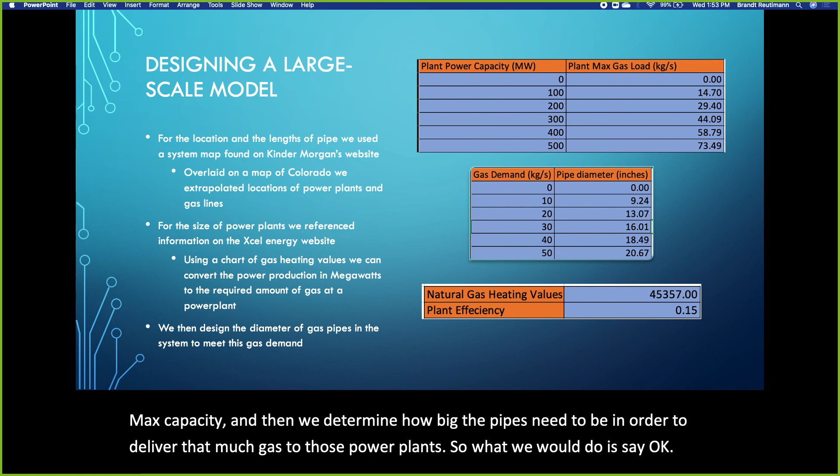We figured out how much gas was needed for each of those power plants to run at that max capacity, and then we determined how big the pipes need to be in order to deliver that much gas to those power plants. So what we would do is say, okay, this is a lot of the engineering of the model, but what does the diameter of the gas pipe need to be in order to deliver that much gas?

So for example, in this table, if we needed 30 kilograms per second of gas, the diameter of the pipe would have to be 16 inches, right? And so we did a lot of little math to kind of figure out, based on our limited knowledge.

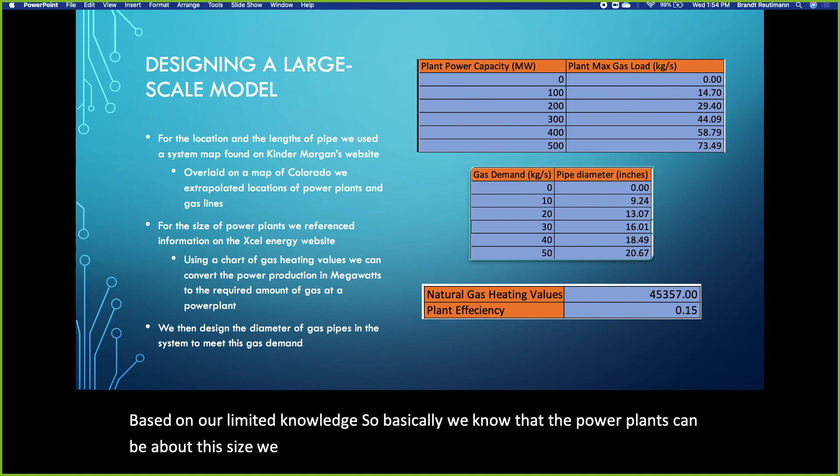So we know that the power plants can be about this size. We know that they might be in these locations. We use that limited knowledge to kind of extrapolate and figure out how big the pipes need to be, how long they need to be, and where they need to be. Okay.

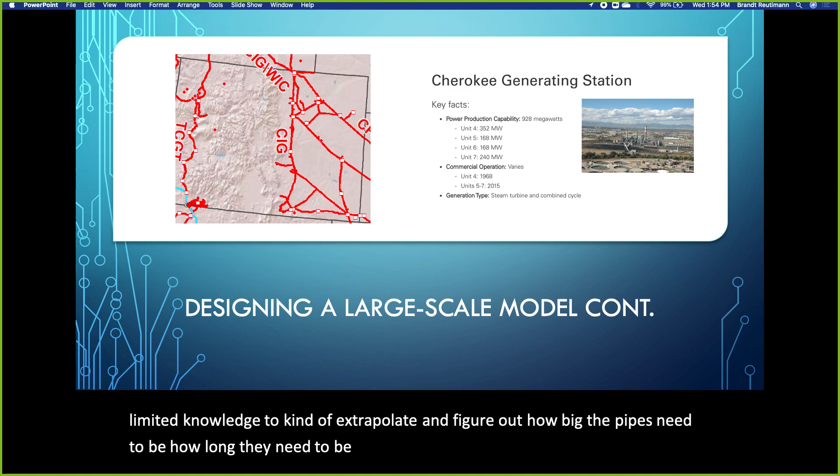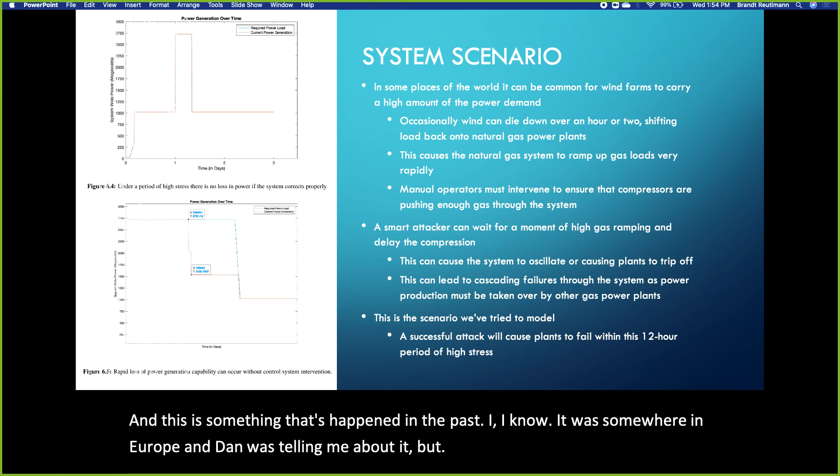So once we had designed the model based on that information, we needed a scenario that we could use. And so the scenario that we looked at is that in some places of the world, and this is actually becoming more common, wind farms can carry a large amount of the power load. And this is something that's happened in the past. I know it was somewhere in Europe, and Dan was telling me about it, but it's possible for these systems to be carrying a very high load, right?

And then what can happen is that the wind can die down really fast or something can go offline. And as a result, all of a sudden the natural gas system has to pick up the slack. And so the system has to ramp up. More gas has to be pushed through the gas lines, and manual operators might have to intervene in order to make sure that all the gas doesn't just totally get evacuated out of the system, but that everything is up and running in order to meet this new demand.

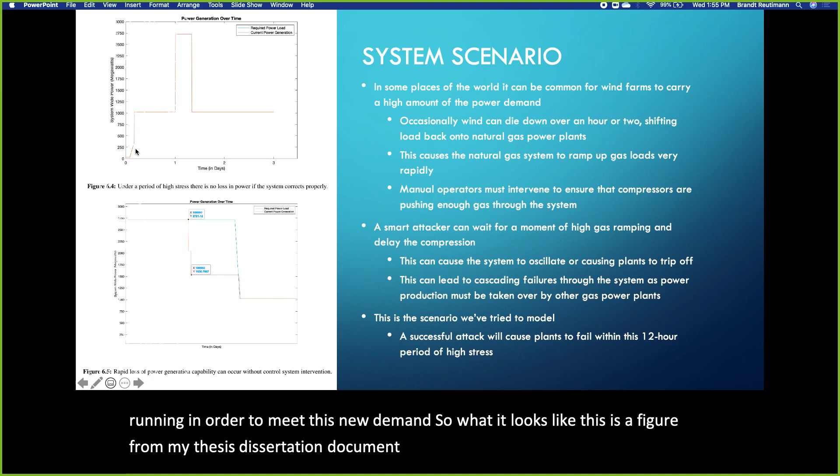So what it looks like, this is a figure from my thesis dissertation document, we'd have a nominal load on our gas generating power plants, and then here our wind farms go offline, and our load spikes up very dramatically for about 12 hours, and then something like everyone goes to bed, or they're able to get the wind farms back up, and it drops back down.

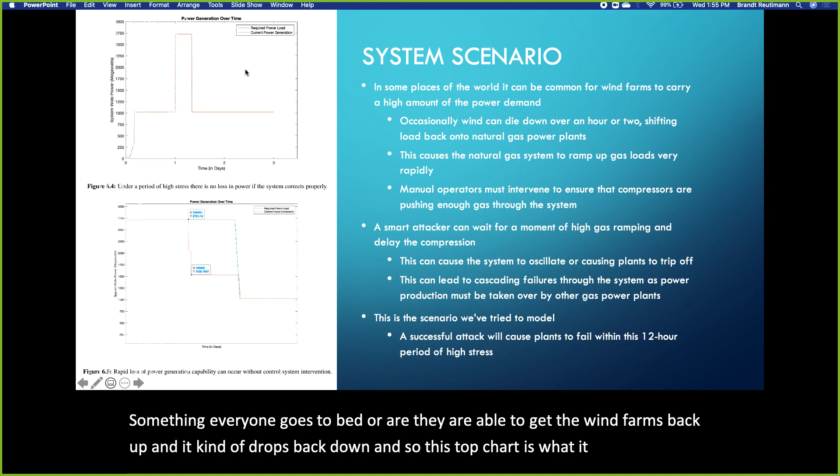And so this top chart is actually from our simulation, what it looks like when there is an intervention from the controller. So the operators basically let those compressors go into overdrive and turn on to higher power in order to meet this demand. And then this bottom chart right here is what the system looks like if you don't ramp the compressors up to meet that new demand.

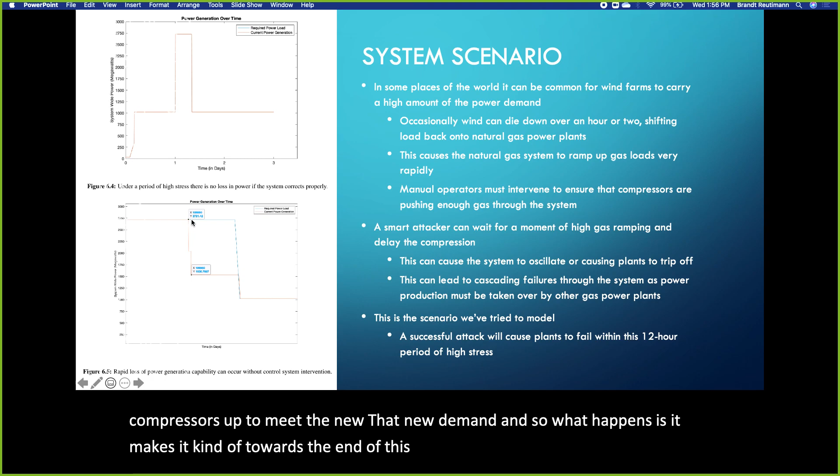And so what happens is it makes it towards the end of this 12-hour window, and then it just starts to drop off. And this is because there is storage in these pipes, so it's able to survive for a little bit without any more gas being put into the system, but eventually everything just kind of breaks down.

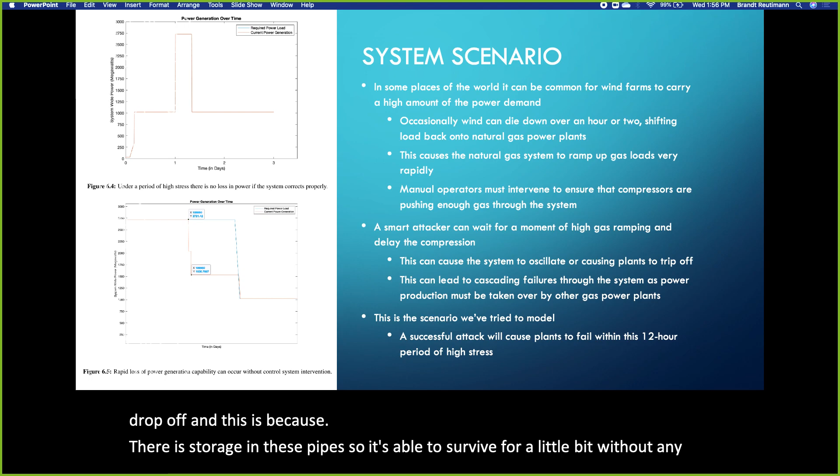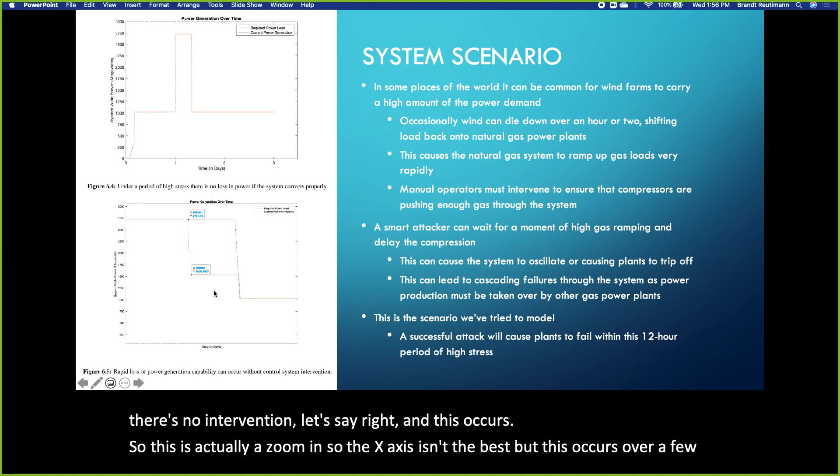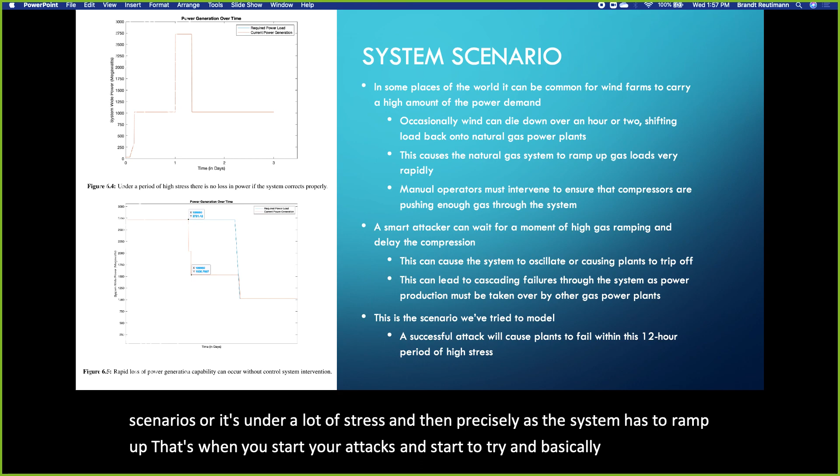So the idea here is, if you're a smart attacker, you can sit on the system and wait for one of these scenarios where it's under a lot of stress, and then precisely as the system has to ramp up, that's when you start your attacks and basically start lying about some of the sensor readings, try to get things to oscillate, get things to trip off, and maybe even cause some cascading failures in order to take this system down. So you're waiting till it's most vulnerable, so to speak, and then that's when you're going to attack, right?

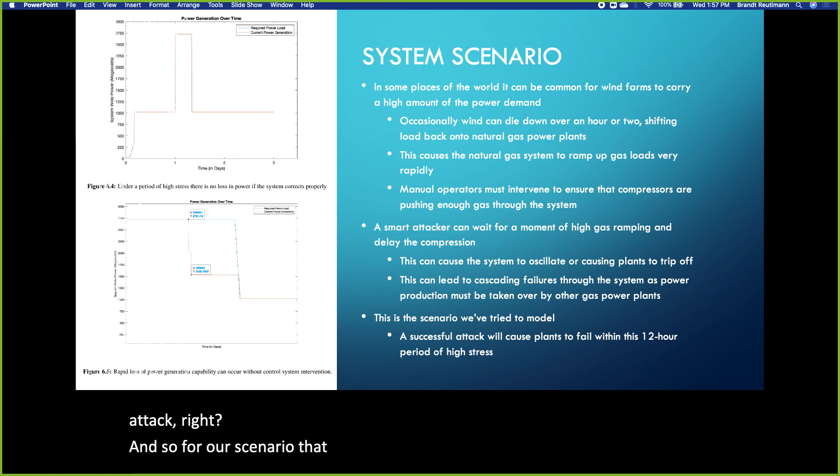And so for the scenario we're modeling, we're going to do some measurement attacks on it, and the operational definition we've set up is that a successful attack will have to cause some plants to fail within this window, right? Because this is when the system is most vulnerable. So what are the first experiments we run on this system? We call them single point of failure attacks. So what we do is for